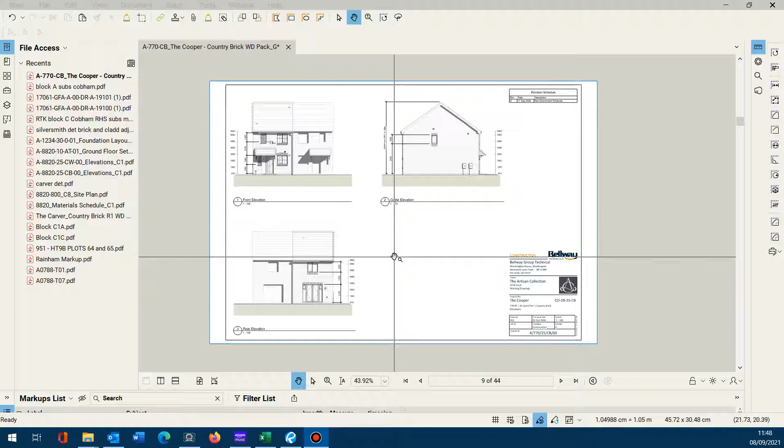This is the second in a series of demonstration videos showing Bluebeam practical uses. I won't show you the whole process, just the pertinent bits. I'm doing a takeoff on a housing scheme, taking off this particular plot type. I won't show the whole takeoff - I'll pause and come back to the next section shortly and explain from there.

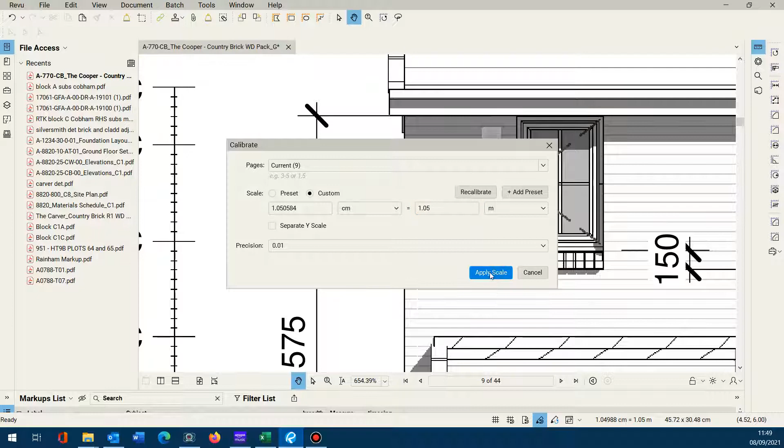So let's get going with our takeoff, calibrate. The point of this video is to show you how speedy taking off with Bluebeam is, and how speedy it is to get the output Bluebeam produces into a spreadsheet for you to further manipulate. I'll come back to the rest of the takeoff once it's done. But here we go with taking off this house type. I'll see you in a couple of minutes.

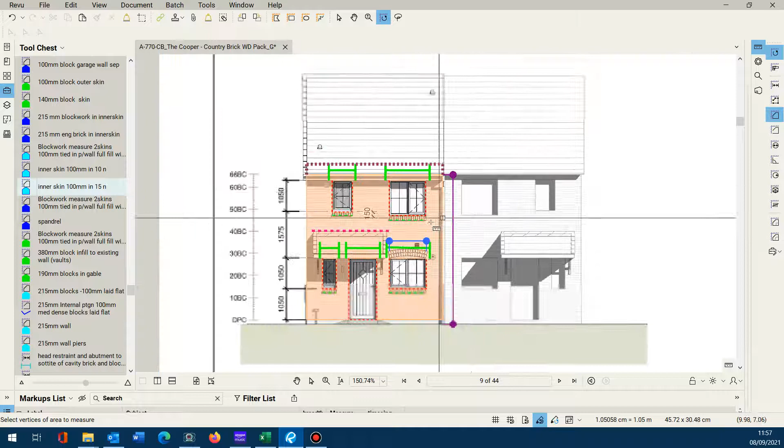Okay, so when I paused, the clock was at 11:50. It's now 11:57. So in that time, I've been able to measure up the facework, cut out the windows, measure the closers, the lintels, the sills, cavity trays, feature arches, wall plates, fire barriers at party walls, meter boxes - and it's all speedy because I've got the preset tools here, as I've explained to you before.

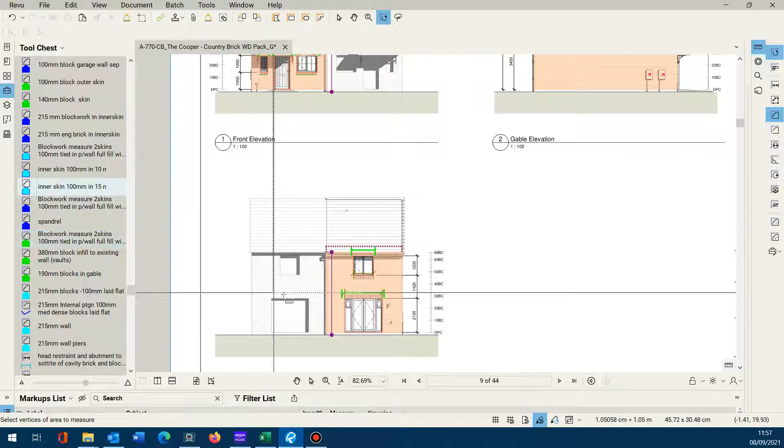Soldiers. Haven't actually completed this takeoff yet. I just need to grab hold of the party wall skin here. So if I just quickly do that, let's calibrate this here. I have a tool for that ready to go.

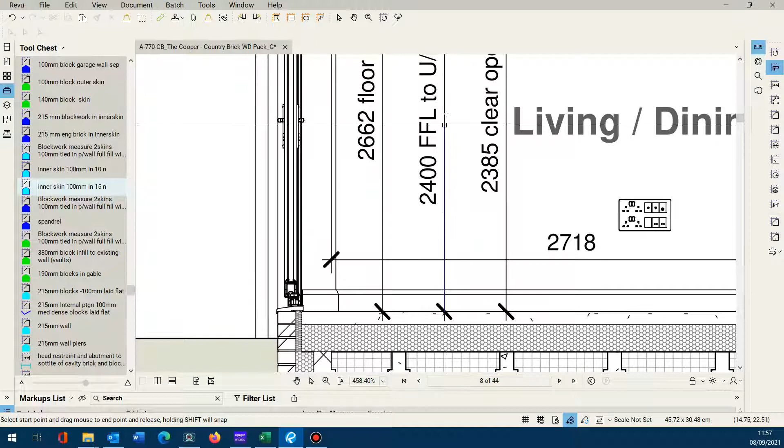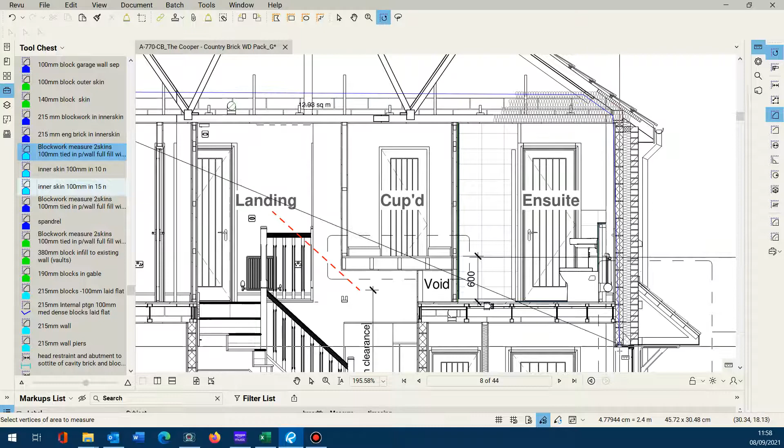One half, and there's a spandrel in this gable, so I've only got to measure to the top of the rafter, the top floor joist rafter, down to the structural slab there.

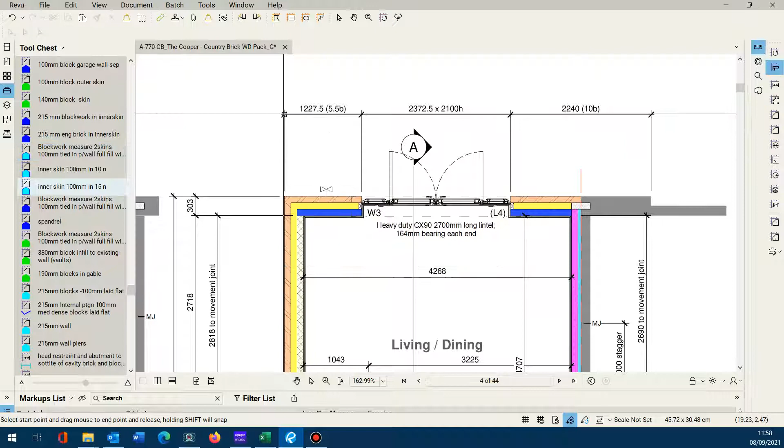That's my party wall, and likewise I need to just take the splash girth. So if I calibrate this, and I take my perimeter girth DPC.

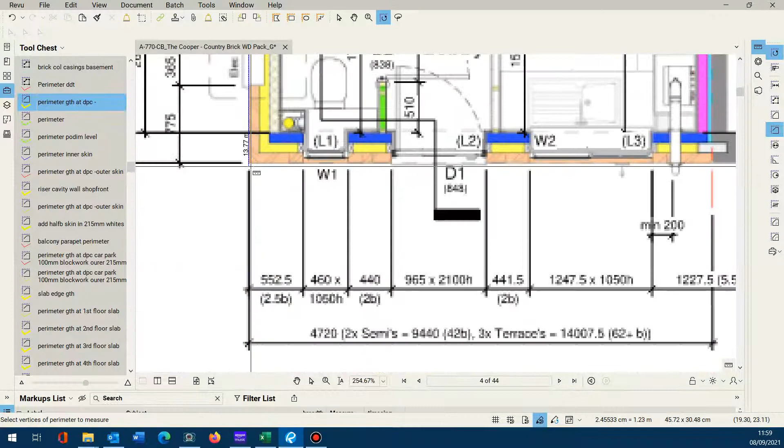I would measure any internal partitions at this stage here. Also, there's a small wing wall on the stairs. And there are a couple of movement joints internally on this - I'm going to mark those up as well, so they get picked up.

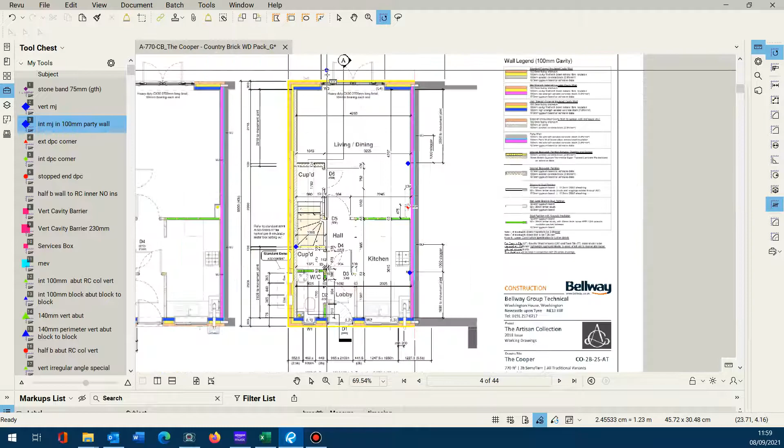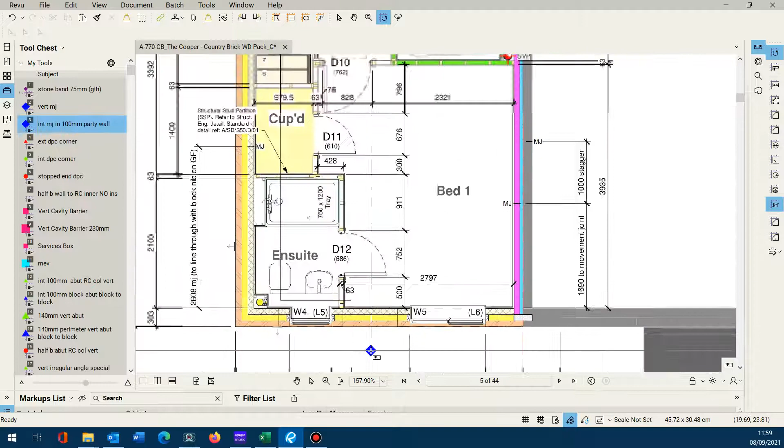So can't see any pad stones or wind posts. Effectively, I've taken everything I need to take from this house type. So we need to get this out so we can include it in our summary pages. I'll best just check the first floor for wind posts and pad stones. Can't see any. No block work.

So good to go. As you know how to export - I think I've shown you in other videos. File, save as. And we're saving it into the takeoffs. Save. So we export to CSV.

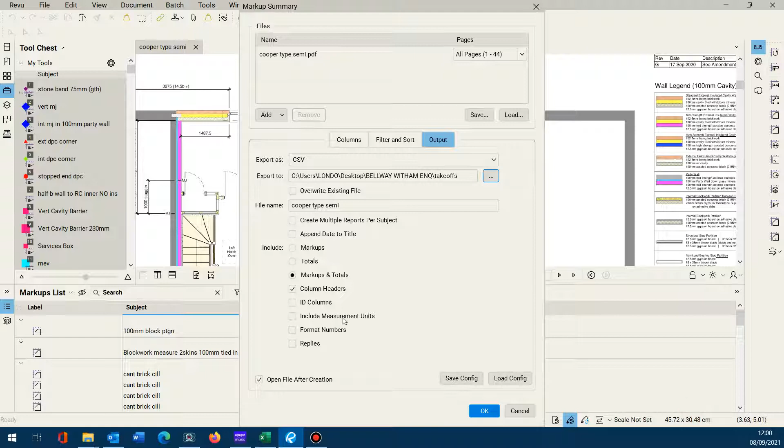Check the folder. Takeoffs. Select the folder, and we're only exporting the markups and totals. That's all we want.

Now, off screen, this popped up. I'm sure you're familiar with the output Bluebeam gives you. So we just save that. Now just know that that's a CSV file, because that's what Bluebeam exports.

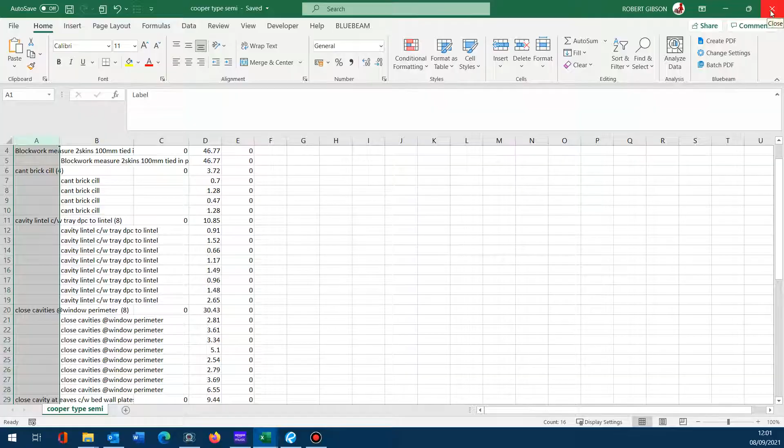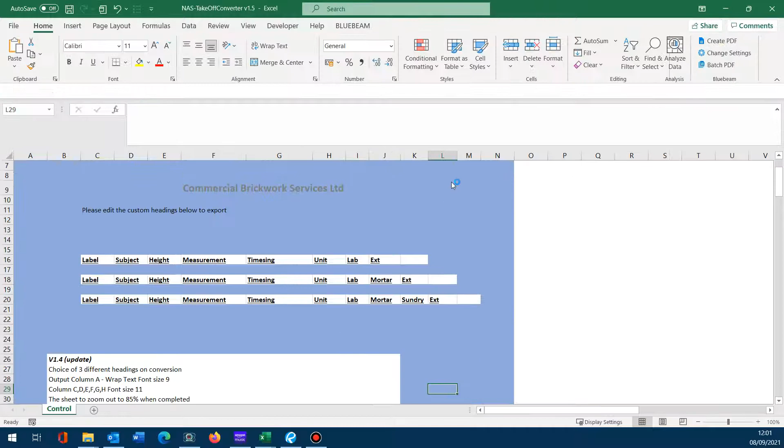What we tend to do is we have a macro built that speeds up the process. If I just show you that in use - current tenders, and we are looking for our takeoff converter, latest version. So that fires up. Sorry, it's opened off screen again. Drag it over here. So enable the macro, and effectively, I can't take credit for this macro, it was a colleague of mine.

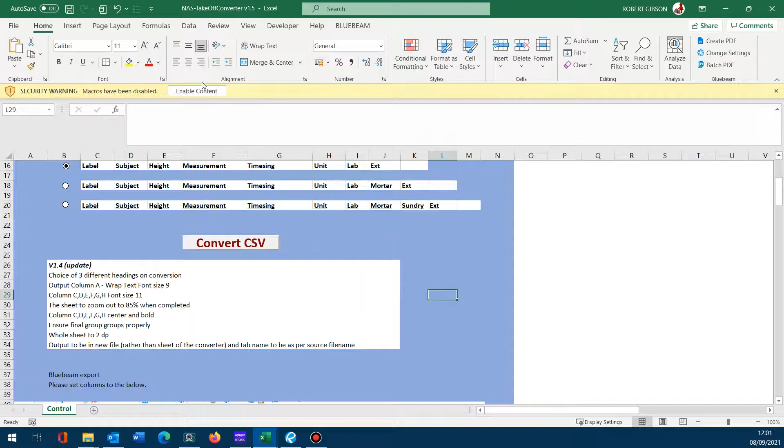Enable the content, so convert. You browse to the file you want to convert, and we were in desktop. We were in that job folder, we were in the takeoffs, and we just did a Cooper type semi. We click that, and what this tool does is basically just put everything into a more functional build type layout for you. It collates everything, puts it all in order, adds descriptions.

There's a lot more you can do with this, but just for speed you can see that I've now got a Cooper takeoff that I can add to the others within the drawing pack. So hope that helps, and you can see I've just taken off that one house type in around about 15 minutes without any printing, without any spreadsheet creation. It's all done from pre-existing tools and just using a custom macro that aids the process.

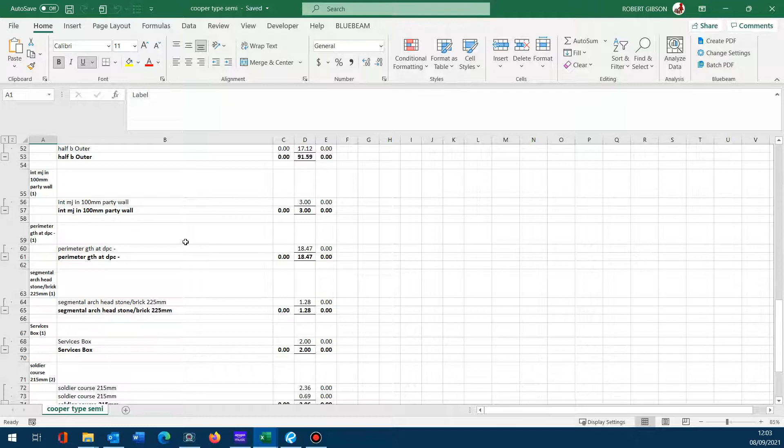Hope that's helpful, and if you want to know any more, get in touch.